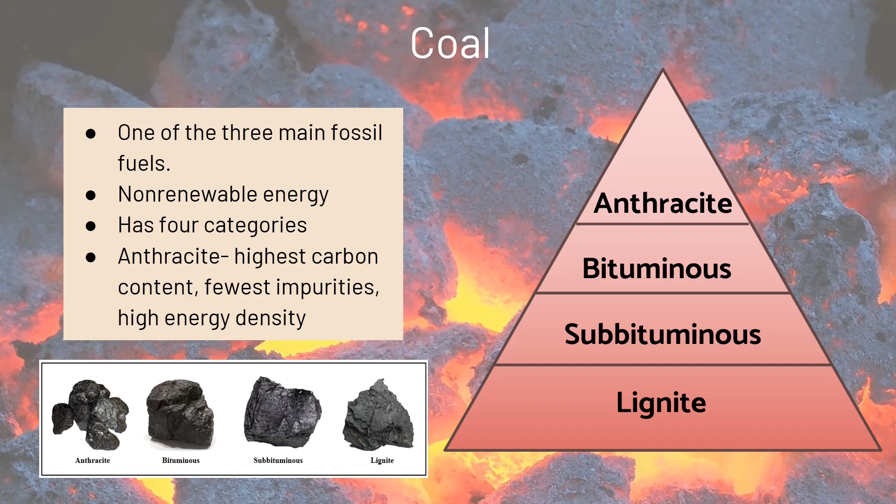The world relies heavily on coal. Around 30,000 coal-fired power plants generated 38% of global electric power in 2018. The world doubled its coal-fired power capacity over the last two decades as the demand for energy increases.

Worst comes to worst, over 1,000 new coal plants are now being constructed. Many Asian countries, particularly China, India, and Indonesia, are expanding the use of coal in power generation.

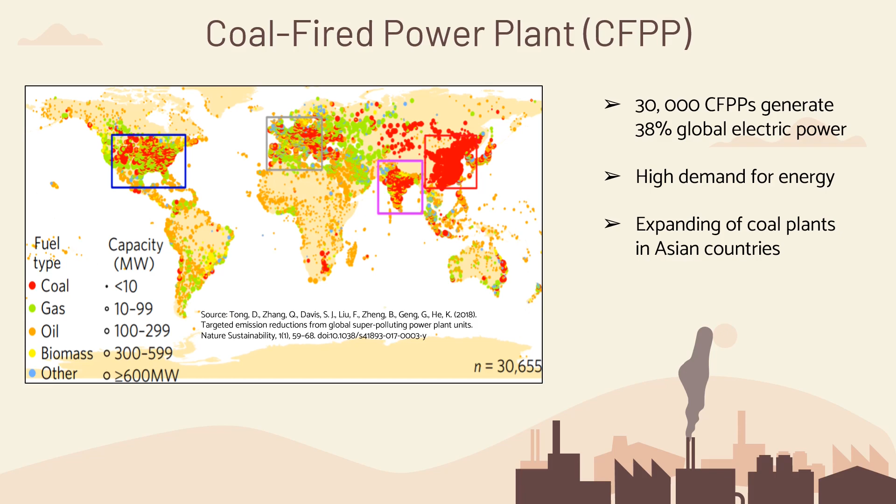As the use of coal power plants rises, it will definitely give impacts to the environment. When coal is burned, it releases a number of airborne toxins and dangerous pollutants.

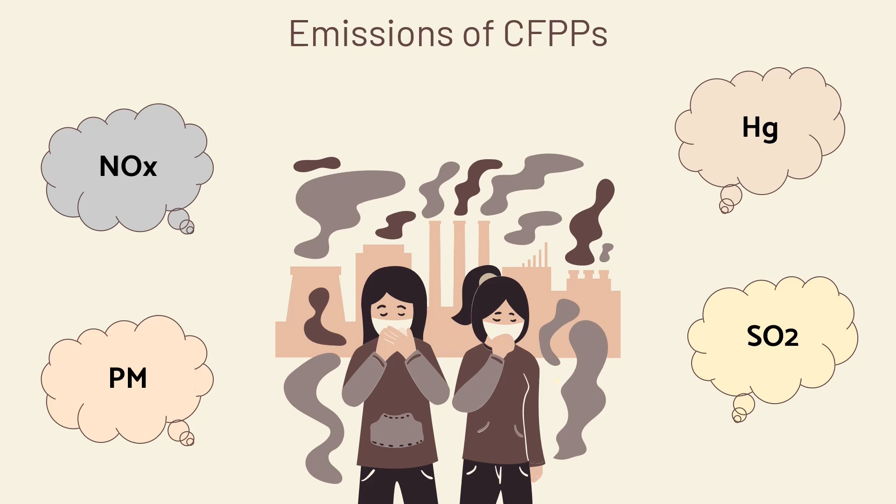They include mercury, lead, sulfur dioxide, nitrogen oxides, particulates, and various other heavy metals. In this project, we will be focusing on particulate emission.

Particulate matter, also known as particle pollution, includes the tiny particles of fly ash and dust that are expelled from coal-burning power plants. Particulate pollution is a mixture of soot, smoke, and tiny particles that originate primarily from coal power plants.

Two size classes are recognized in regulatory schemes: PM10 and PM2.5. Sometimes they are all regarded as total suspended particles, or TSP.

Fine particles are either emitted directly from coal power plants or are formed in the atmosphere through complex oxidation reactions.

Particulates are of great concern because they are so tiny that they can be easily inhaled. Coal burning can cause asthma, heart disease, cancer, and premature deaths.

In 2013, the World Health Organization said both air pollution and particulate matter are classified as Group 1 human carcinogens, and the risk was similar to that of inhaling secondhand tobacco smoke.

In the industry, pulverized coal combustion, or PCC, is the most common technology to produce energy from coal. In this process, coal is pulverized by coal mills in order to be ground to fineness. An airstream as oxidant is injected into the coal mills to form an air-coal mixture in the boiler.

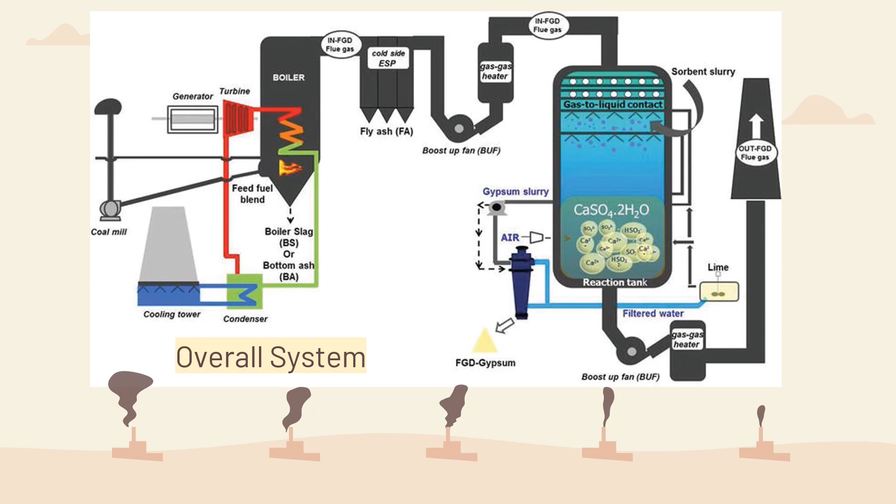Common particulate control devices such as electrostatic precipitators, baghouses, wet scrubbers, and cyclones remove coal combustion byproducts from flue gas. The two most common control devices are ESP and baghouse.

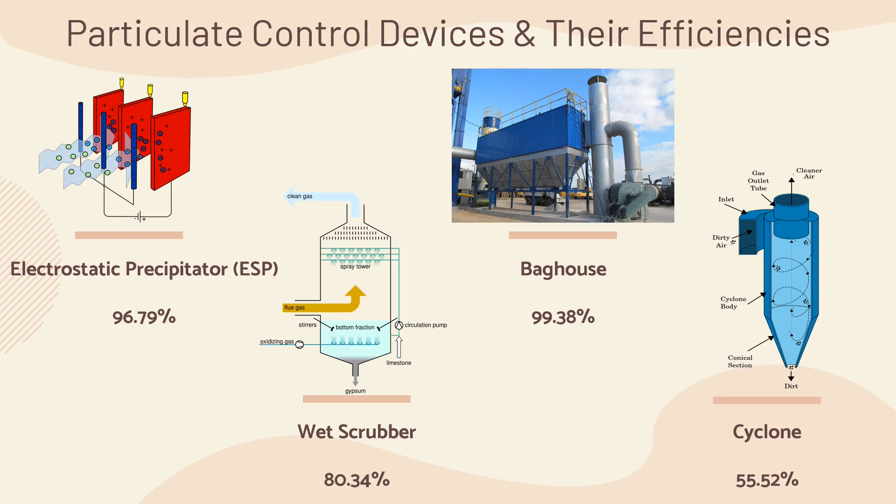The efficiency of baghouses easily reaches up to 99%, whereas electrostatic precipitators are able to hit 96% removal efficiency. With that, cleaner flue gas will be released into the atmosphere.

Hello, I'm Elaine. We have done a literature survey related to the particulate emission of coal-fired power plants. We want to situate our project in relation to existing knowledge. Several papers were extensively reviewed and five papers were summarized in the table.

The study sites were India, China, and Indonesia, countries that heavily rely on coal-generated power stations. Anthracite, bituminous, and sub-bituminous coal were used in those plants.

The material loading, or coal loading, varied from 162,000 kilograms per hour in Java to approximately 500,000 kilograms per hour in New Delhi.

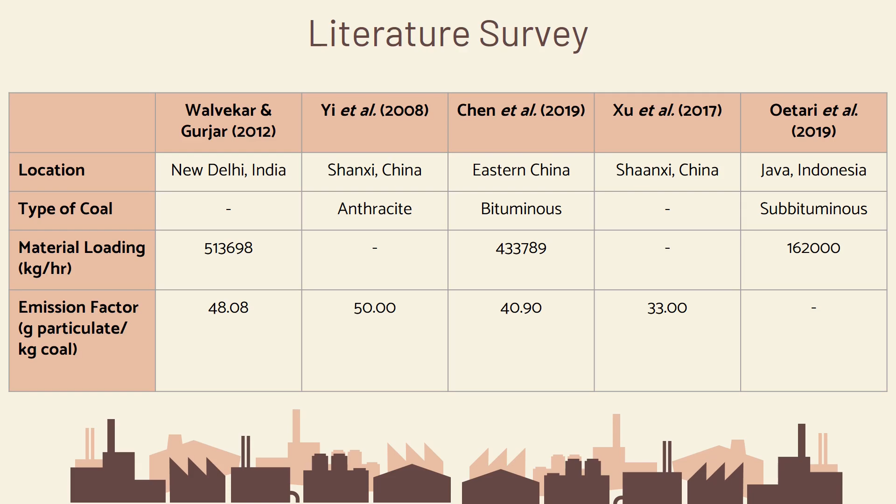The emission factors fluctuated between 33 to 50 grams of particulate per kilogram of coal. Emission factor is a basic tool in developing national, regional, state, and local emission inventories for air quality management.

and in developing emission control strategies as set by the United States Environmental Protection Agency, EPA. It is a representative value that attempts to relate the quantity of a pollutant released with the activity associated.

According to the research teams of Tong and Xu, emission factor is the multiplication of ash content in coal, ash retention fraction, and mass fraction of particulate matter.

Meanwhile, Zhao and others reported that emission factor is the product of ash content in coal, ratio of bottom ash to total ash, particulate mass fraction, and removal efficiency of pollutant control technology.

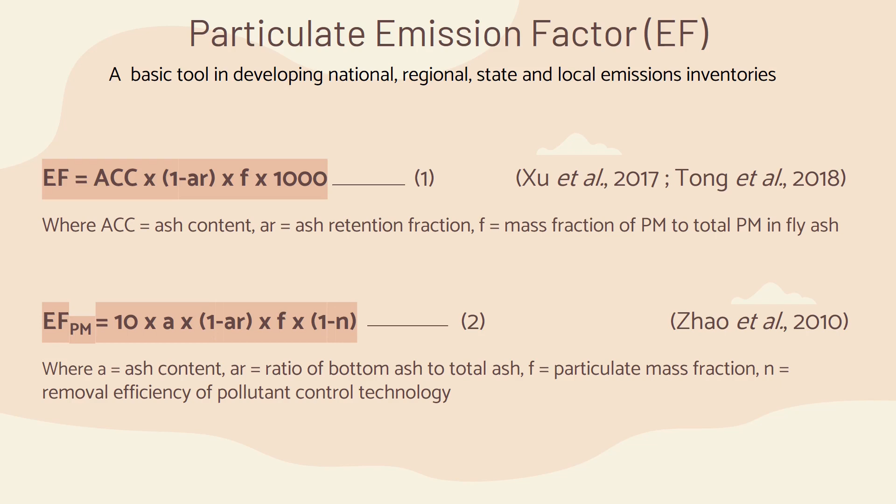The calculated emission factor will be substituted into the fundamental equation of particulate emission. As stated by Segner, the rate of emission is the product of emission factor and amount of material loading.

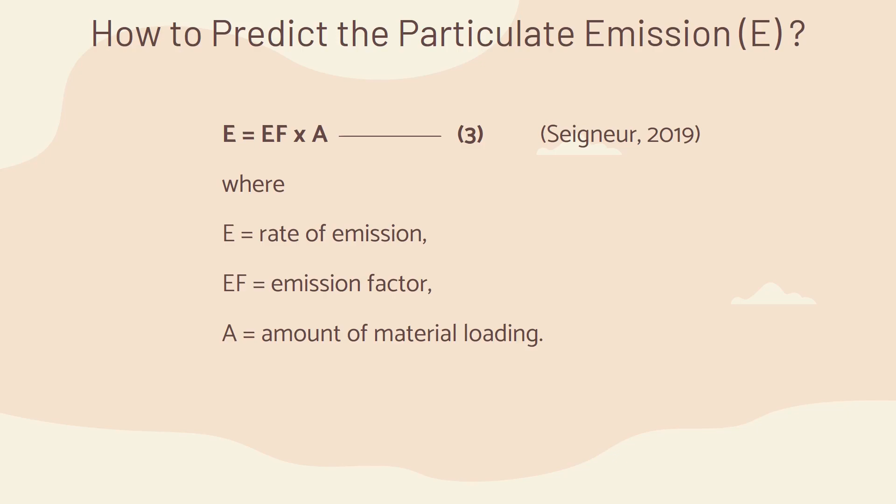Implementing equation 1, the emission factor is calculated to be 20.1825 grams per kilogram. At the same time, the rate of emission is...

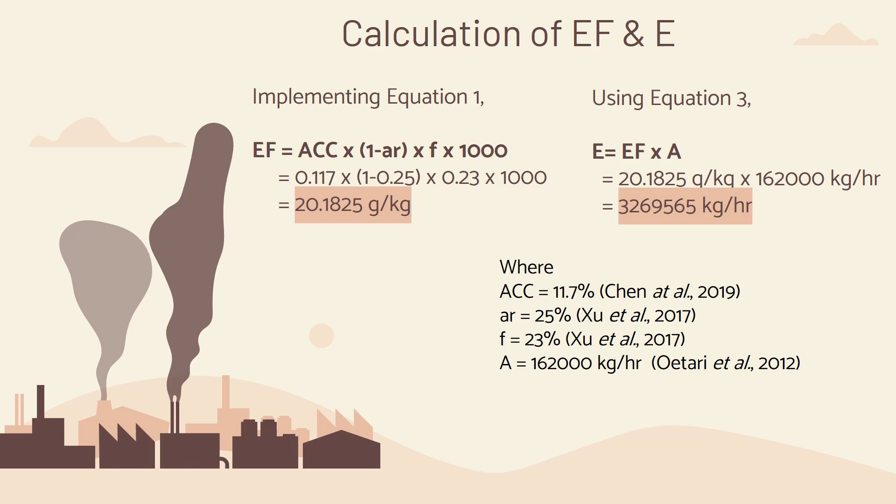3,269,565 kilograms per hour when we work it out using equation 3. All the values are extracted from numerous research papers due to the incompleteness of data.

Now we will figure out the minimum efficiency requirement of the air pollution control device to meet the requirements of the Department of Environment, DOE.

The particulate emission standard for coal-fired power plants is 30 milligrams per cubic meter, regardless of new or long-existing plants.

To calculate the particulate concentration, we need to divide the particulate emission rate by the volumetric flue gas flow rate. We obtain...

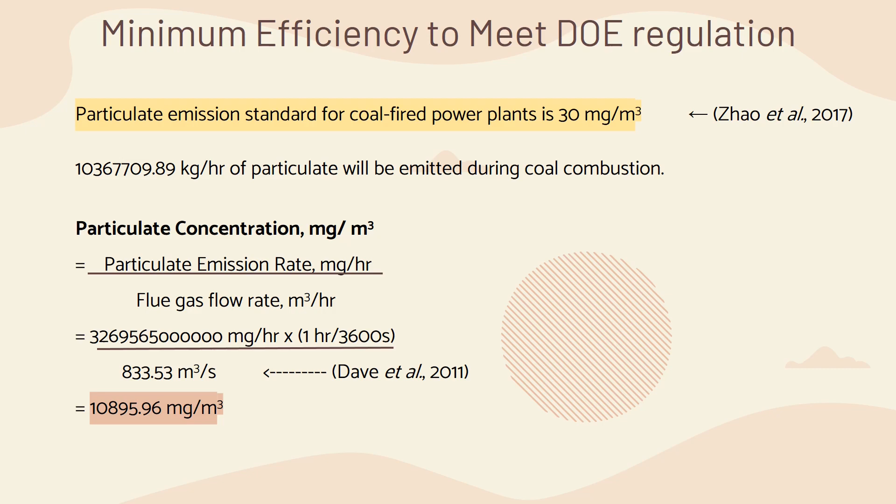10,895 milligrams per cubic meter of particulate.

Minimum efficiency of the particulate control device is equal to the particulate concentration emitted minus the particulate concentration allowed by DOE, over the particulate concentration emitted, and we have to multiply it by 100%.

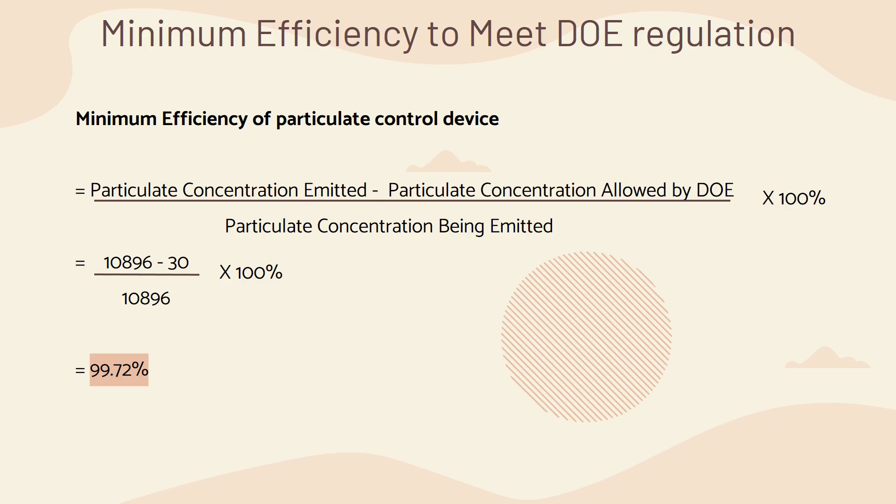The minimum removal efficiency must reach up to 99.72% to satisfy the rules and regulations.

As part of ongoing efforts to strengthen control of coal power plant emissions, an early estimation of particulate emission is vital. To sum up, the result from this study can be used for source apportionment and emission inventory calculations.

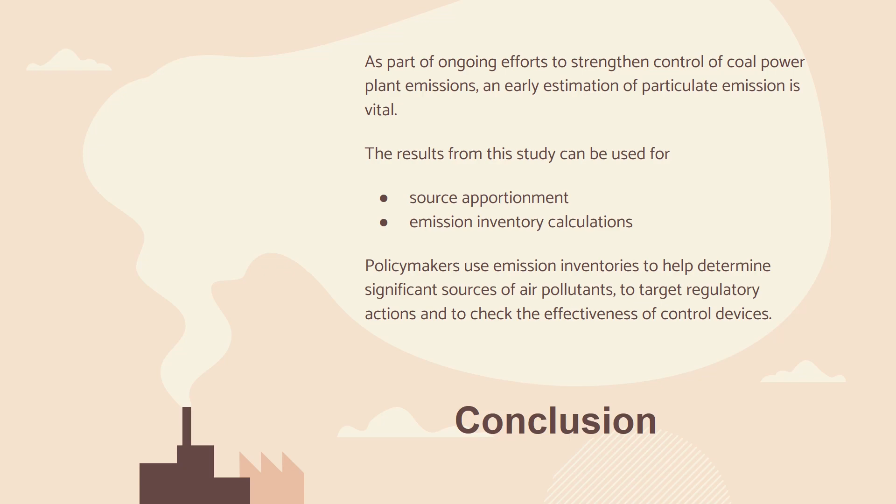Policymakers and local authorities use emission inventories to determine significant sources of air pollutants, to target regulatory actions, and also to check the effectiveness of control devices.

The effect of air pollution is deadly, and we should be part of the solution, not part of the pollution.